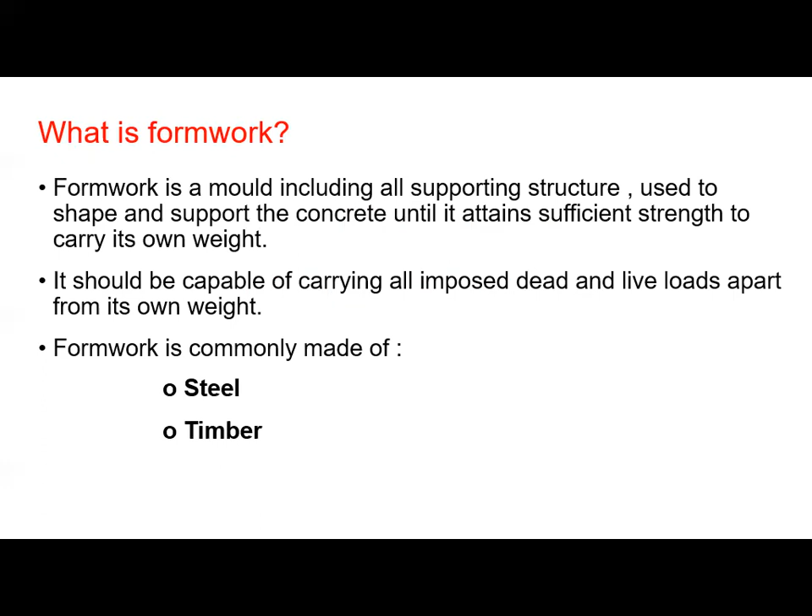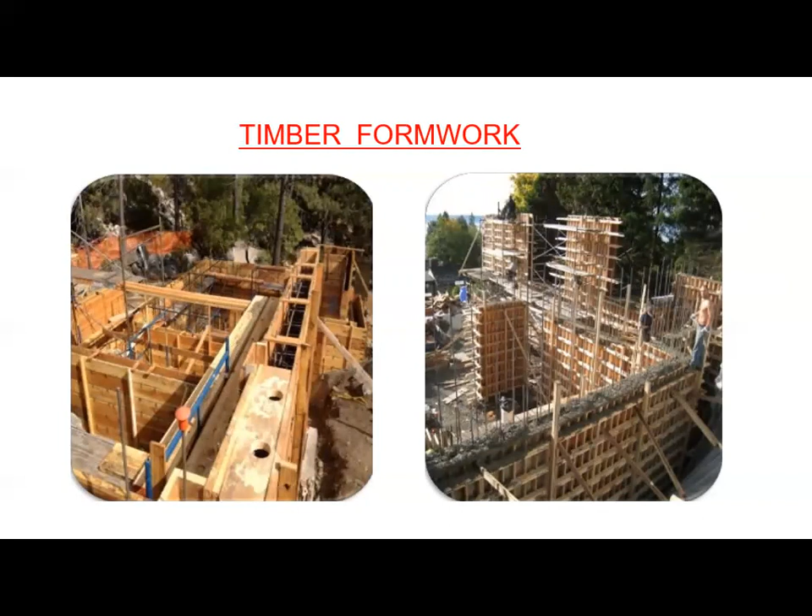It should be capable of carrying all imposed dead and live loads apart from its own weight, and normally it is of steel and timber material. Nowadays fiberglass is also used for making this formwork. So this is the photograph of timber formwork. That is the old and famous design for construction activity. Then this is a steel formwork.

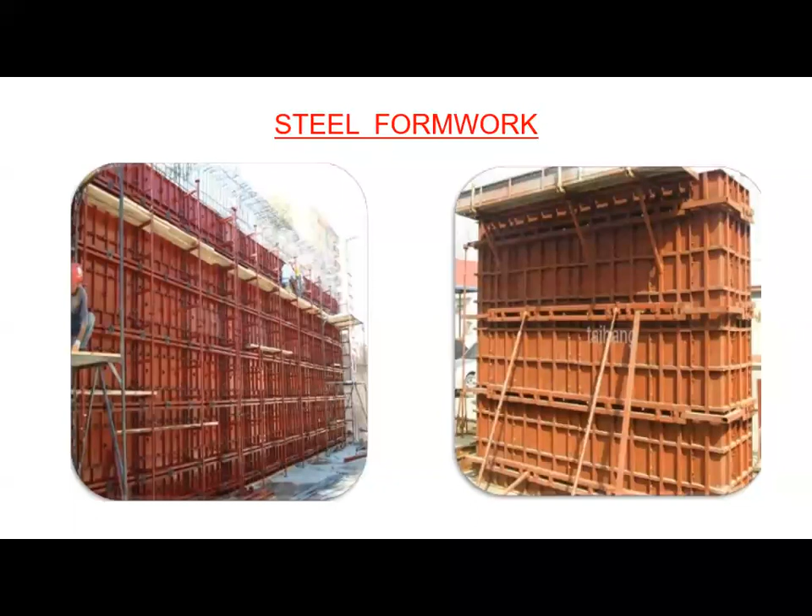So what are the general characteristics of this formwork? Formwork has been in use since the beginning of concrete constructions. Even before concrete was utilized in construction, we utilized this formwork. Generally timber formwork was used, and then metal or steel formwork came to be used. And nowadays fiberglass is also used. So these new materials such as steel, plastic, fiberglass are used.

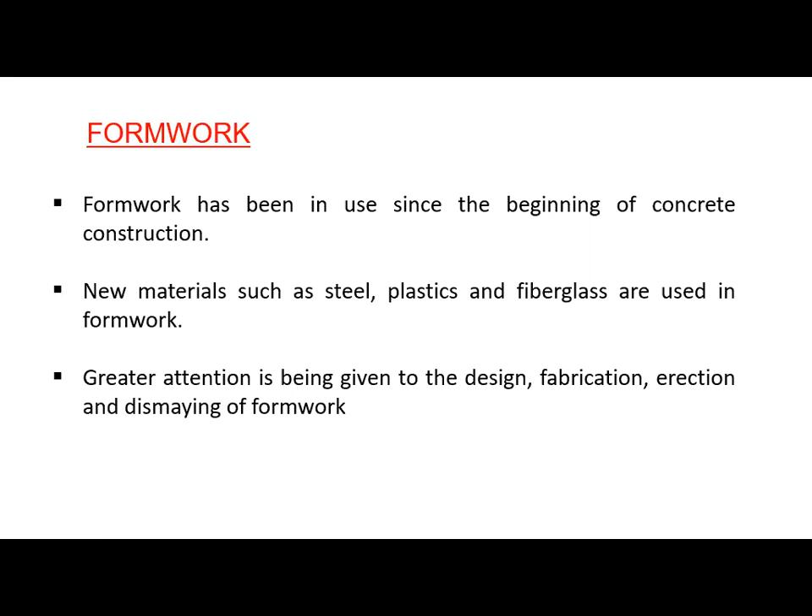Greater attention is being given to the design, fabrication, erection, and dismantling of the formwork. We have to design this formwork in such a way that fabrication should be easy, erection and commissioning should be easy, assembling and dismantling should be easy, and it should consume very little time to assemble and disassemble. So we have to think about all these things while finalizing the design of this formwork.

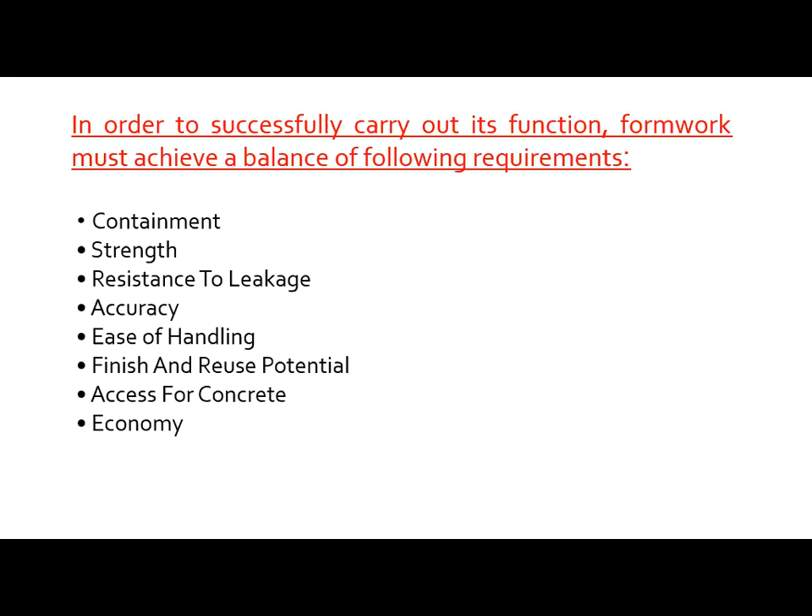And in order to successfully carry out its functions, formwork must achieve a balance of some parameters. We have to think about containment, strength, resistance to leakage, accuracy, ease of handling, finish and reuse potential, access for concrete, and economy. That is nothing but the cost of the formwork, which should be cheap or at least at the optimum cost. So we have to balance all these parameters for purchasing or finalizing the designs of this formwork.

So what is containment? The formwork must be capable of shaping and supporting the fluid concrete until it cures, because nowadays most construction activities use concrete mixture. So if we are using concrete, we have to think about shaping and supporting, and that should be supported by that design or structure.

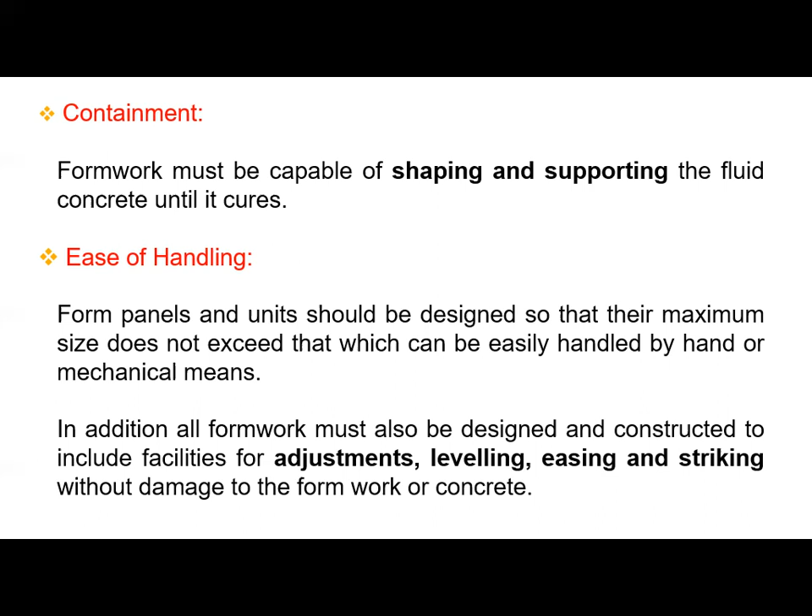Then this formwork should be adjustable, in such a way that leveling, easing and striking without damage are possible with it. That point is called ease of handling. So it should be very easy to handle all these types of formwork.

Then the strength of this formwork should be thought of, because we are using concrete, water, and labor. So think about the weight of fluid, weight of concrete, weight of labors, weight of equipment or tools used by the labors, and environmental loading. We have to think about all these things. That is why the strength of the formwork is very important.

And then economy. We know that if metal structure, fiberglass, or heavy, strengthened timber is used, then the formwork is very expensive. Generally, on average about 35% of the total cost of any finished concrete unit or element can be attributed to its formwork. So if you calculate 35% of the total cost of the finished concrete unit, that is equivalent to the cost of the formwork.

And out of that, 40% can be taken for the material and 60% for the labor. So this is the general guideline for the cost of the formwork. That is why we have to think about the design and material of this formwork in such a way that we can reuse it to minimize the cost.

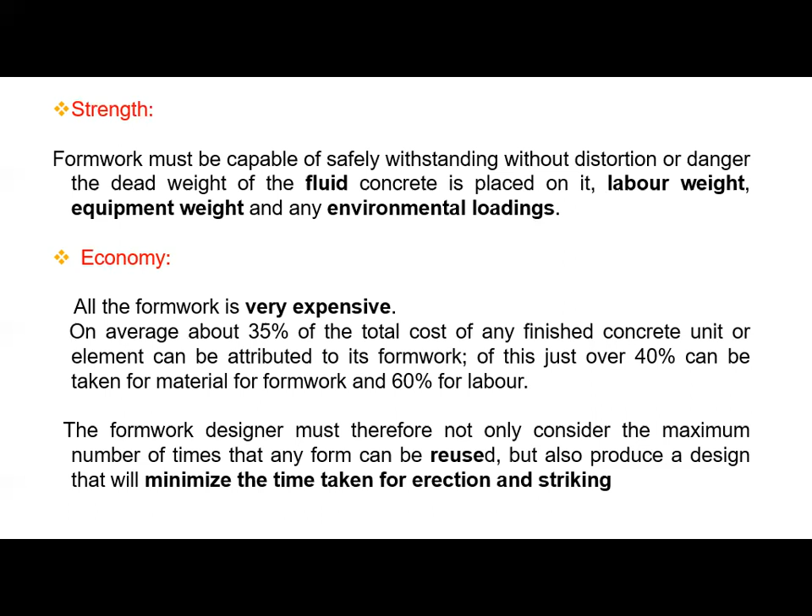And also we have to think about minimizing the time taken for the erection and striking. So these are some of the guidelines and the characteristics of this formwork. The specific objective of this formwork is related to quality, safety, and economy.

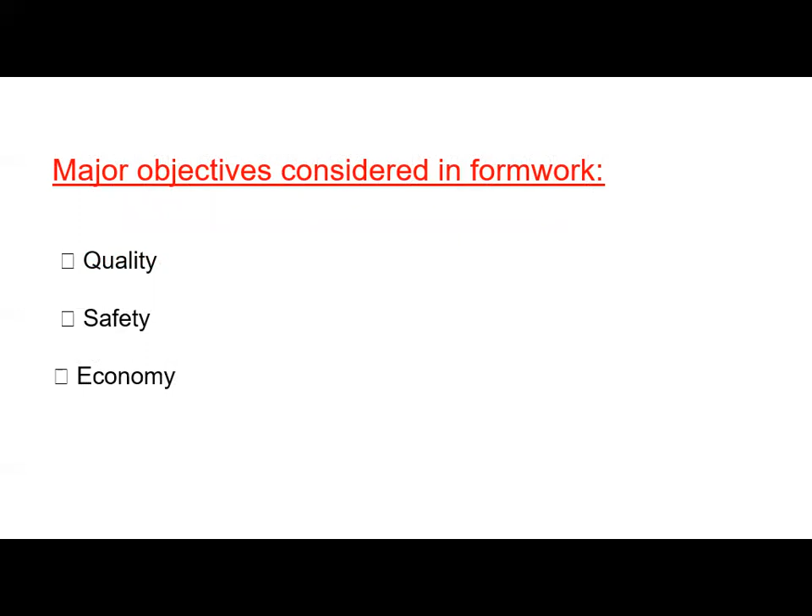Related to quality, the formwork must be designed and built in such a way that it has sufficient stiffness and accuracy so that the size, shape, position, and finish of the cast concrete are maintained.

Then from the safety point of view, it should have sufficient strength and factor of safety so that it is capable of supporting all the loads, because we have already discussed the environmental loads, the labor loads, the tool loads, equipment loads, concrete load, or the other fluids which are used in the construction work. So all these loads should be carried by this formwork.

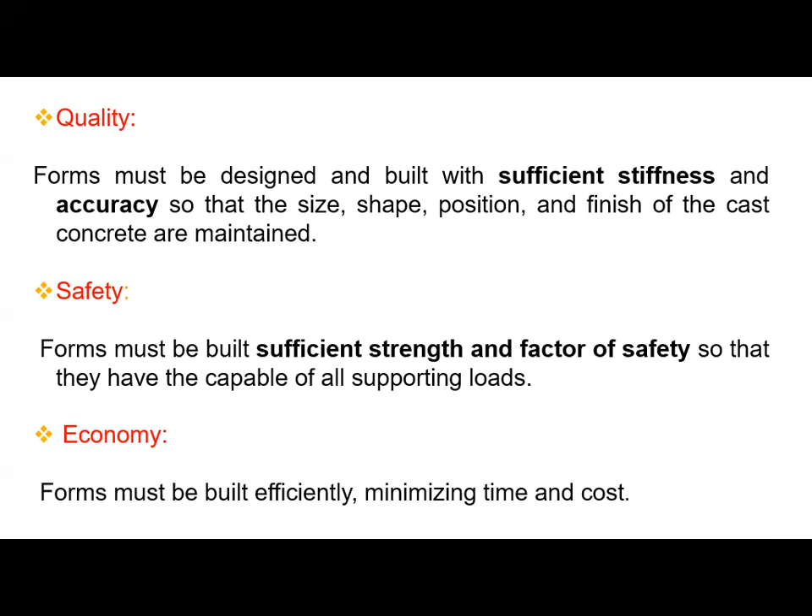And obviously the economy, so it should be optimum in costing, and it should minimize the time for striking and erecting. Then these are the basic requirements related to the formwork: the material should be cheap and reusable. It should be practically waterproof so that it does not absorb water from the concrete.

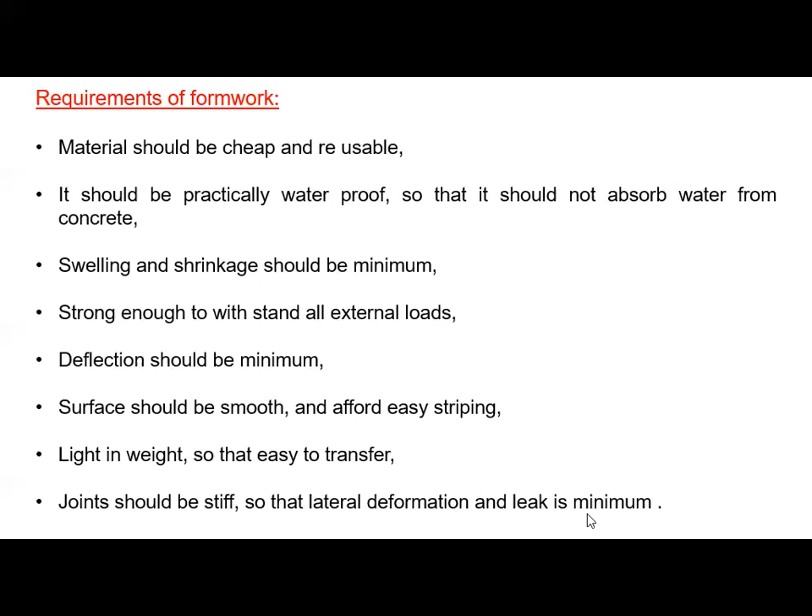Then swelling and shrinkage should be minimum, strong enough to withstand all external loads. Deflection should be minimum. Then the surface should be smooth and afford easy stripping. Then light in weight so that it is easy to transfer. Joints should be stiff so that lateral deformation and leakage is minimum. So no leakage, waterproof, lightweight and easy to handle. These are some of the requirements for the formwork.

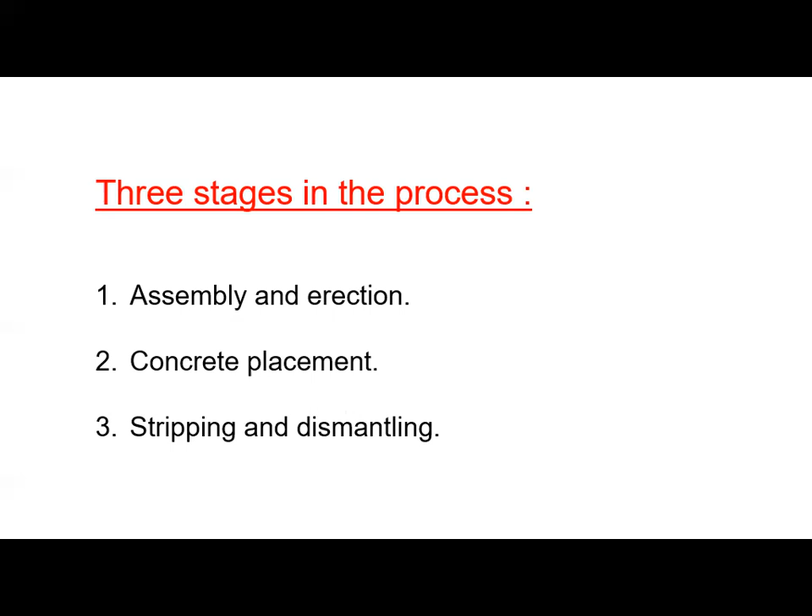So there are 3 stages in the process of this formwork: the first is assembly and erection, the second one is concrete placement, and the third one is stripping and dismantling. So these are the steps related to the formwork in concrete construction. That construction may be of buildings, bridges, residential apartments or commercial apartments.

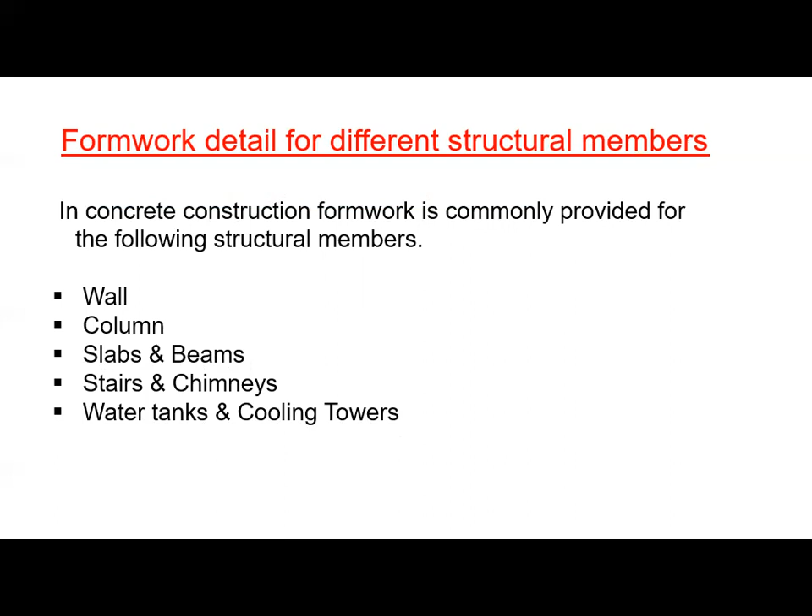So in concrete construction, formwork is commonly provided for the following structural members: wall, column, slabs and beams, stairs and chimneys, water tanks and cooling towers. So these are the different structural members related to the formwork.

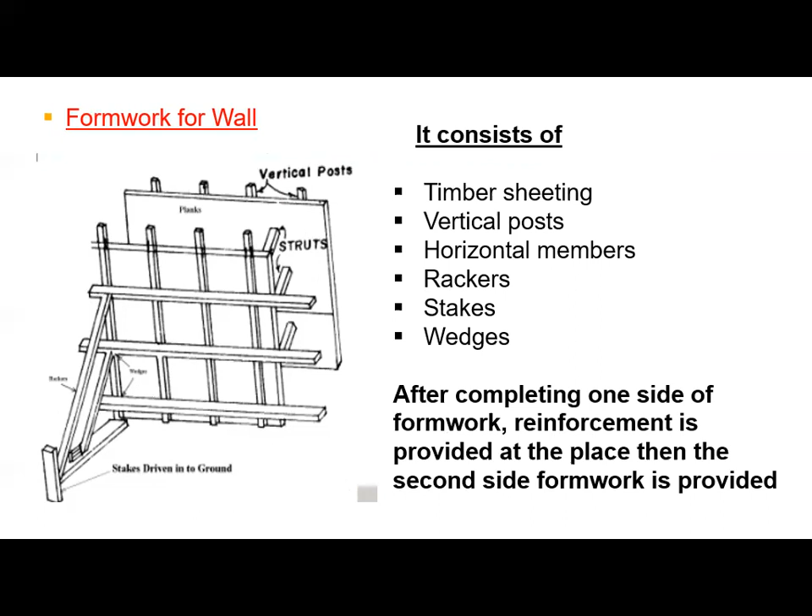So this is formwork for a wall. It consists of timber sheets. From this sketch you can understand, this is the timber sheeting. Then this is the vertical post. Then horizontal members, then rakers, stakes and wedges. So from the sketch itself, you can understand the function of each and every element of this formwork for the wall.

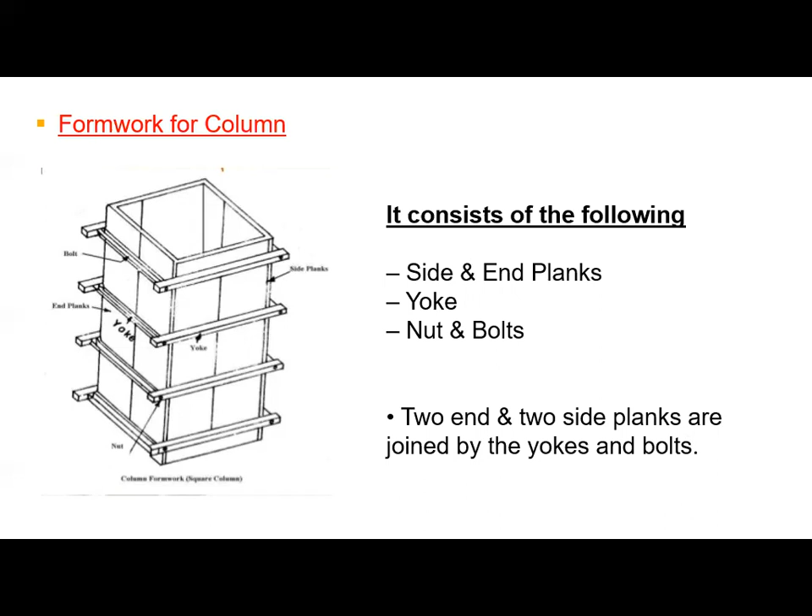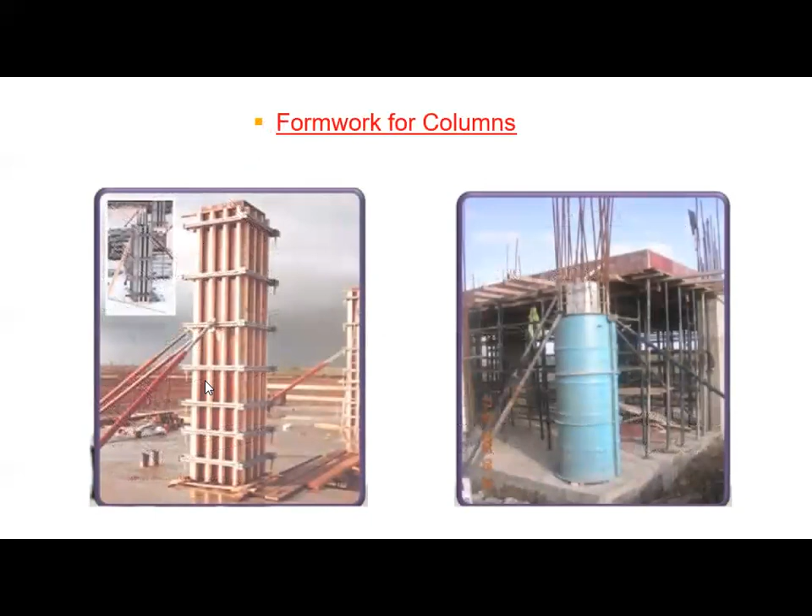Now, the main thing in construction work is concrete. Anyone who works around big or heavy concrete slabs should be aware of the hazards related to concrete. Generally, contractors, subcontractors and their casual wage workers are involved in these construction activities, but they must know about the potential to cause severe harm related to concrete, because they are actually working on the platforms and handling this concrete.

So there are mainly two types of concrete, that is dry concrete and wet concrete. Dry concrete mainly involves cement or cement dust, which is packed in 50 kg bags. Its handling, safety precautions and hazards have different characteristics, and wet concrete also has different hazardous characteristics. So with the handling of dry and wet concrete, significant damage is possible in this type of work.

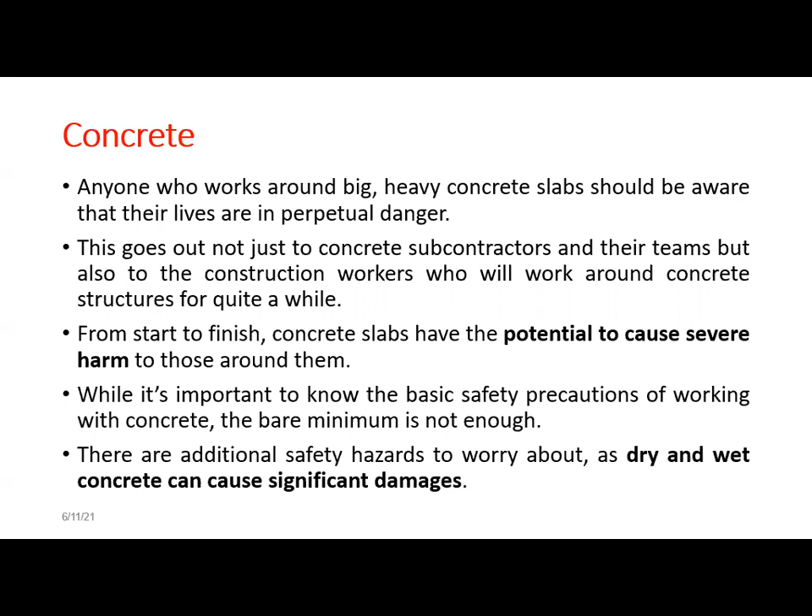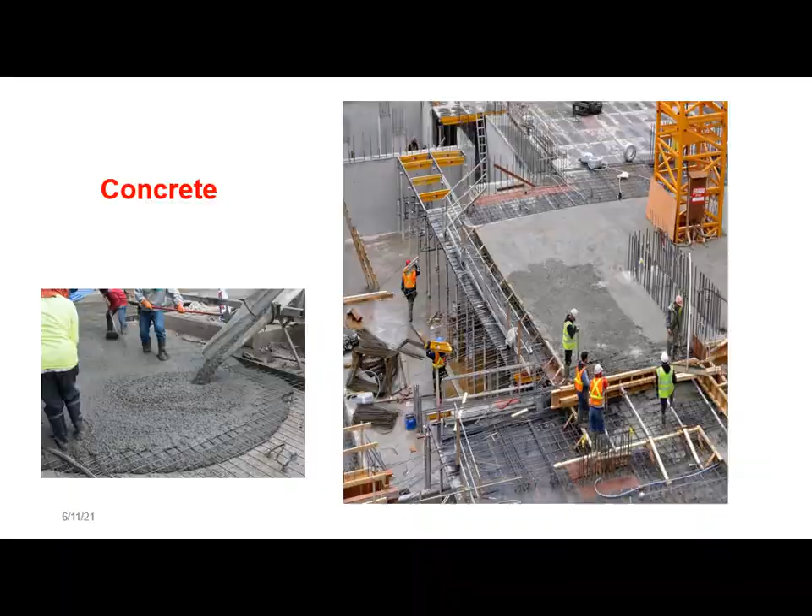So what are the rules or safety requirements related to concrete? Everyone who works with concrete should be aware of the required safety regulations. Mainly the OSHA regulations are given.

In that, the specific guideline is related to the PPE, that is personal protective equipment. So if you are handling this dry or wet concrete, then we have to wear gloves and safety glasses. And also there should be a provision of an eye wash station, because in case of contact of these concretes with the skin, the face or the eyes, we have to utilize this eye wash station for washing that particular part of our body to wash off that concrete.

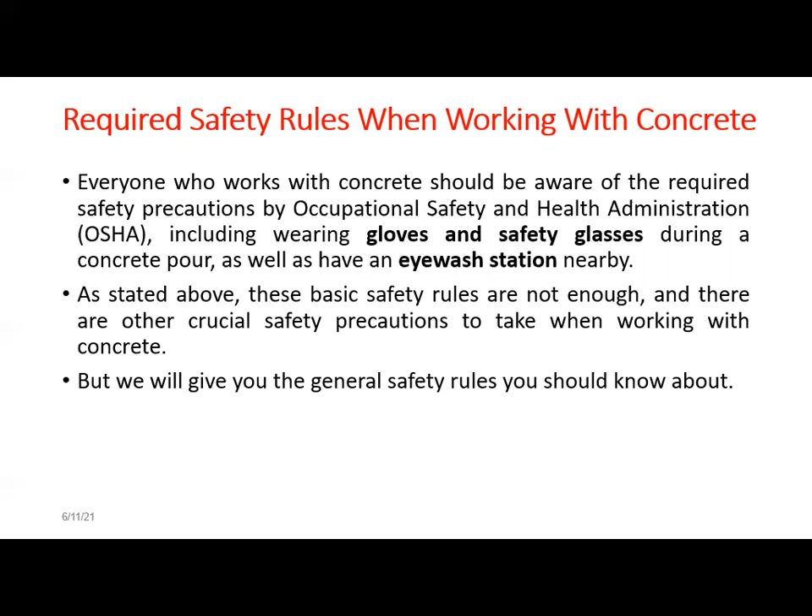So there are various hazards or risks involved in concrete. The first is mixing risk. So we know that concrete is nothing but a mixture. It is the general mixture of cement dust, sand, water, and some crushed stones. That depends on the concrete construction, but these are the major elements.

So this cement dust, or generally we call it concrete dust, can cause breathing problems, because this dust has a size at the respirable suspended particulate matter level. So this is the RSPM criteria, and the size of that cement dust is such that we are going to breathe this dust if it is available in the breathing area. So again, that can cause lung issues, which can cause temporary or permanent damage to our lungs after inhalation for a longer time and at frequent intervals.

So the second risk is pouring risk. When we have prepared this mixture, we have to pour this mixture into that particular part where the construction is going on. Initially this mixture has slippery characteristics. So concrete can be slippery until it dries. That is the characteristic of the wet concrete mixture. So due to these slippery characteristics, there is another danger, that is the slipping and falling hazard.

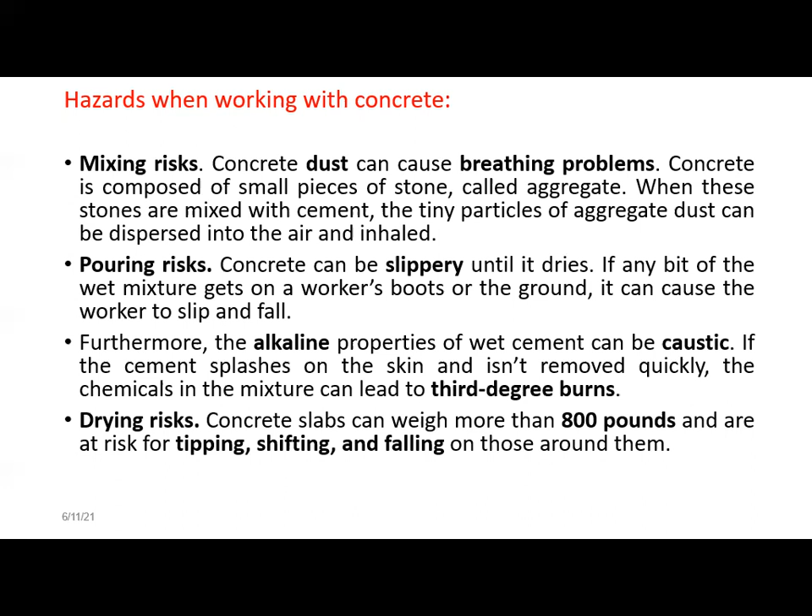Then the next risk is drying risk. So approximately more than 800 pounds of weight is there due to this concrete structure on the slab, and that is why there is a risk of tipping, shifting and falling on those around them. So those are the different risks related to concrete.

And these are the general dangers related to concrete. If you are working with concrete, some of the dangers are workers falling onto concrete slabs, workers being crushed by slabs falling from cranes or forklifts, workers getting pinned between concrete slabs, workers suffering heat stroke while cleaning truck mixer drums, workers being impaled on rebar sticking out of the concrete slabs,

workers getting caught in concrete mixers or covered with concrete, workers being burned or blinded by the concrete chemicals due to the alkaline or caustic properties, and workers suffering back injuries from lifting heavy concrete slabs. These are the different dangers related to concrete.

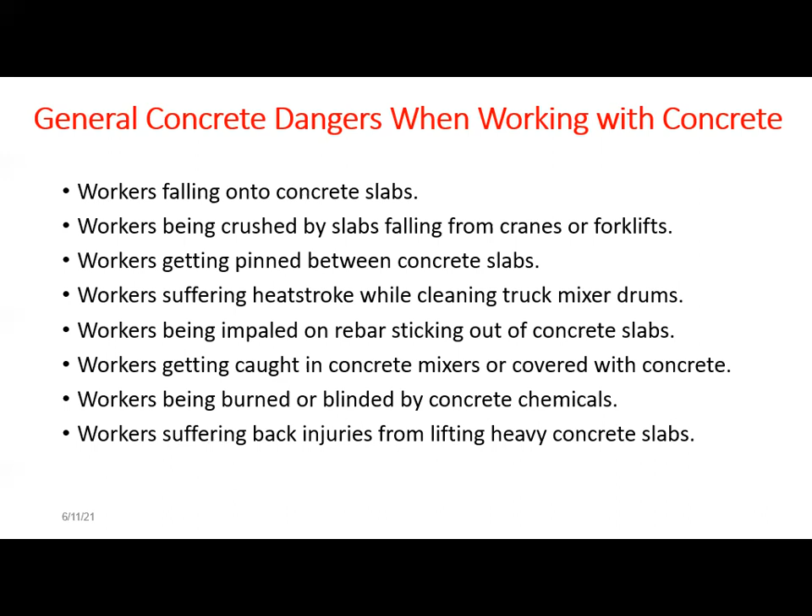So if any worker complains about back pain or some irritation to the skin, irritation to the eyes or some other issues, then we have to take care about these guidelines or the safety or precautionary measures while working with concrete. So these are some of the guidelines specifically for dry concrete as well as for wet concrete.

Related to dry concrete, dry concrete can irritate the eyes, nose and throat as well as the skin, and there may be chances of silicosis or lung cancer due to the silica dust. As this cement is made up of silica, there may be chances of silicosis also. So what are the safety precautions for handling dry concrete?

We have to use the eyewash station or eyewash bottles, and we have to flush the eyes with water. So flushing of eyes is one of the safety precautionary measures. Then washing your hands with soap and water. So to minimize or nullify the effect of this caustic or alkaline cement, we have to use soap and plenty of water for washing our hands.

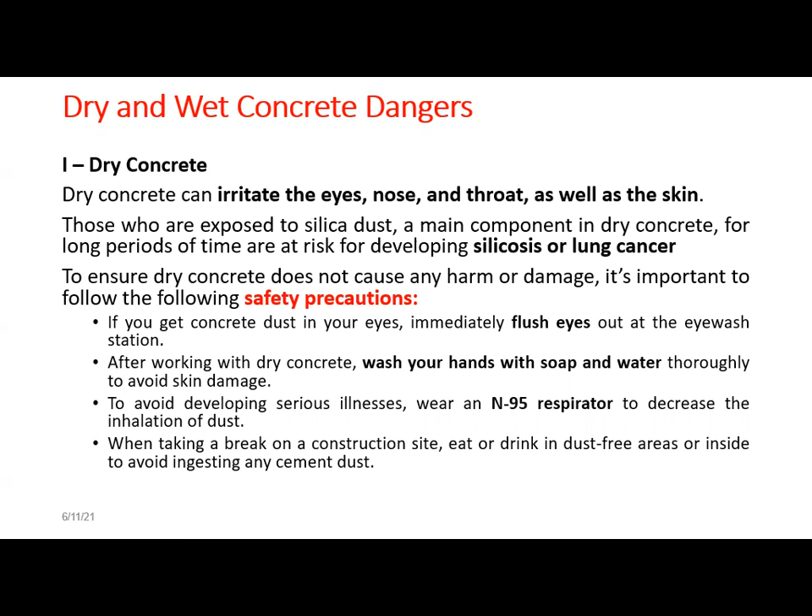To avoid silicosis or lung diseases, or to avoid the respiration of this dry concrete or cement into our respiratory systems, we have to utilize N95 respirators. Then, when taking a break on construction, eat or drink in dust-free areas. That is the recommendation to avoid ingesting any cement dust. So these are related to the dry concrete.

Now, related to the wet concretes. As we know, wet properties are there, meaning moisture or water is present. So obviously the risks related to the respirable suspended particulate matter, or RSPM, of concrete or cement dust are going to be minimized, and that is why many hazards are minimized due to these wet properties. But still, there are some properties of wet concrete that may present hazards. So for that purpose, we have to take care in handling these wet concretes.

Some of the safety precautions: to protect your skin and eyes, wear alkali-resistant gloves, because we already discussed that wet concretes have alkaline properties, that is, they are caustic. So we have to wear alkali-resistant gloves. Then long sleeves and long pants are preferred to avoid skin contact. If possible, waterproof boots and eye protection should also be provided. It is good practice to keep extra gloves and safety glasses at construction sites.

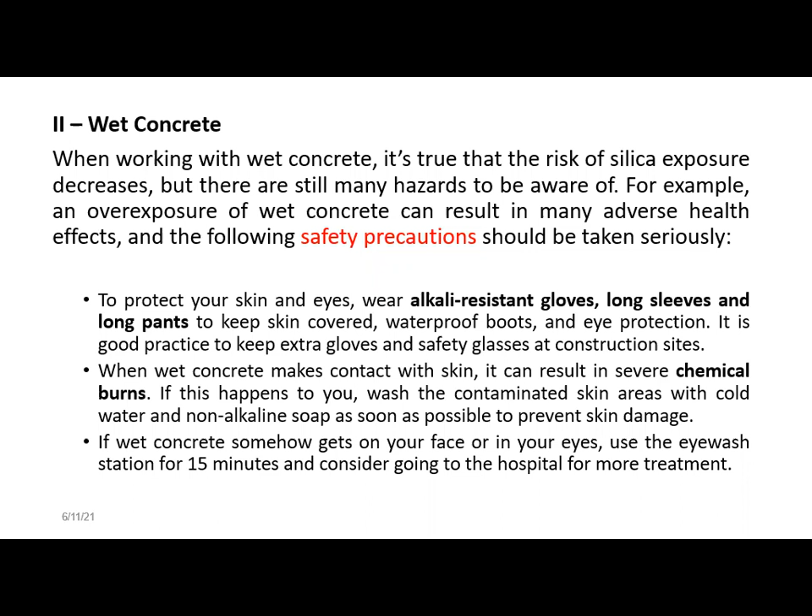When wet concrete makes contact with the skin, it can result in severe chemical burns. If this happens to you, wash the contaminated skin areas with cold water and non-alkaline soap as soon as possible to prevent skin damage. And we have to wash the face or eyes for at least 15 minutes with the help of an eye wash station or eye wash bottles if your skin, face or eyes come in contact with wet concrete. After that, if the irritation or complaint of that worker continues, we have to visit a doctor or hospital. So these are some of the guidelines for dry concrete and wet concrete.

Now, this is another part of the construction site, called cofferdams. We have learned about formwork, concrete structures and some safety precautionary measures. From this photograph you can understand what a cofferdam means. So what is a cofferdam? Cofferdams are temporary enclosures to keep out water and soil so as to permit dewatering and construction of a permanent facility in the dry. We provide temporary enclosures to keep out the water and soil. That is the main objective or purpose of cofferdams.

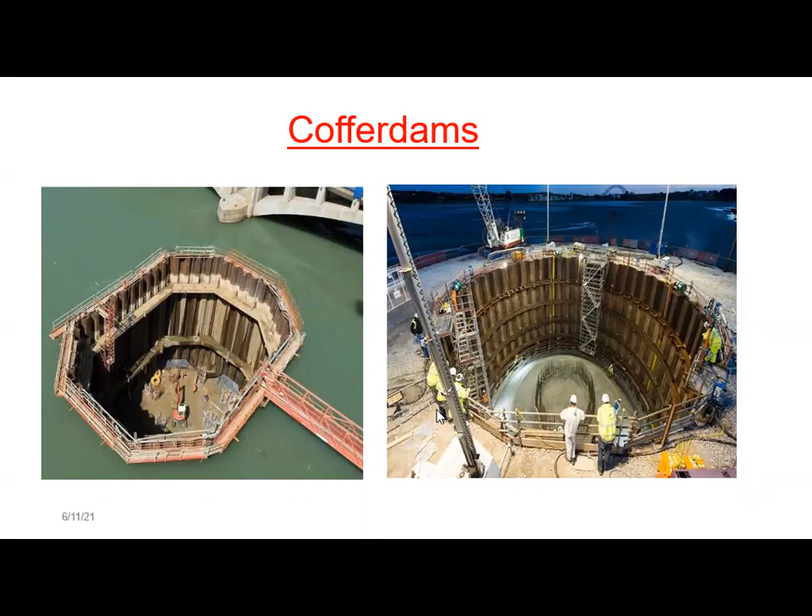A cofferdam involves the interaction of the structure, soil and water. The loads imposed include the hydrostatic forces of the water, because in this picture you can see that some cofferdams are surrounded by water, and this water produces hydrostatic force on the cofferdam. Sometimes cofferdams are isolated from the water to avoid these hydrostatic forces. But whenever that is not possible, we have to calculate these hydrostatic forces for design purposes. Then dynamic forces are also there due to currents and waves. So we have to consider both hydrostatic and dynamic forces while designing cofferdams.

In construction of cofferdams, maintaining close tolerances is difficult since cofferdams are usually constructed offshore and sometimes under severe weather conditions, because the main objective of a cofferdam is to keep out water and soil. In these circumstances, significant deformation may occur: due to these forces and unexpected changes in weather, waves or ocean water, there may be changes in the shapes and sizes of these cofferdams. So we have to think about these deformations.

Significant deformation of cofferdam elements may happen during construction, and therefore it may be necessary to deviate from the design dimensions in order to complete the project according to plan. So in the design dimensions, we have to consider hydrostatic forces, dynamic forces, and deformation possibilities or worst cases, and only then decide the dimensions of the cofferdam design. In cofferdam construction, safety is a paramount concern since workers will be exposed to the hazards of flooding and collapse.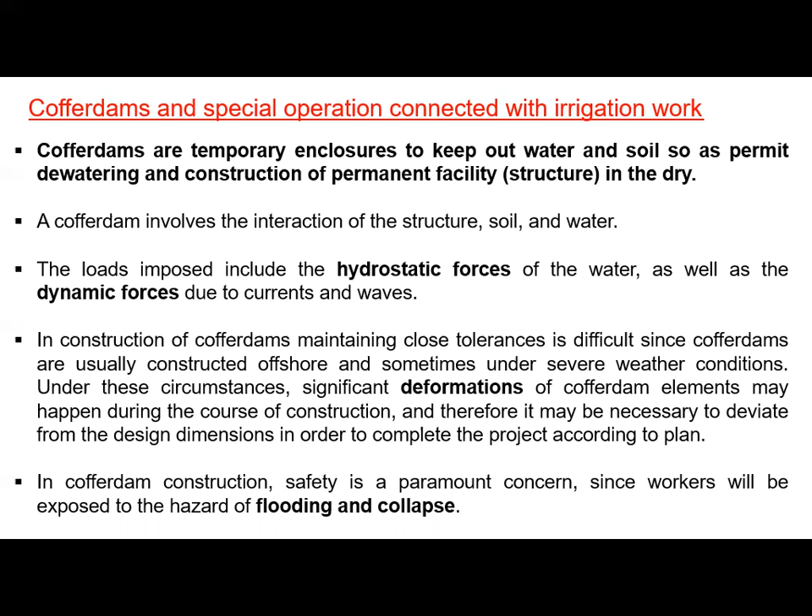So there may be a chance of flooding, and sometimes if the forces are more, especially I'm talking about the hydrostatic forces, if the forces are more than expected or the average calculations, then there may be a chance of collapse. So if this coffer dam collapses, there may be fatalities, because we have very little chance to isolate these workers or to remove these workers from these coffer dam structures.

So there are different types of coffer dams: first is braced, second is earth type, third is timber crib, and fourth one is double wall sheet pile. So the braced coffer dam is formed from a single wall of sheet piling which is driven into the ground to form a box around the excavation site. So we are going to prepare this box. So if it is box type, then it is called a braced type coffer dam.

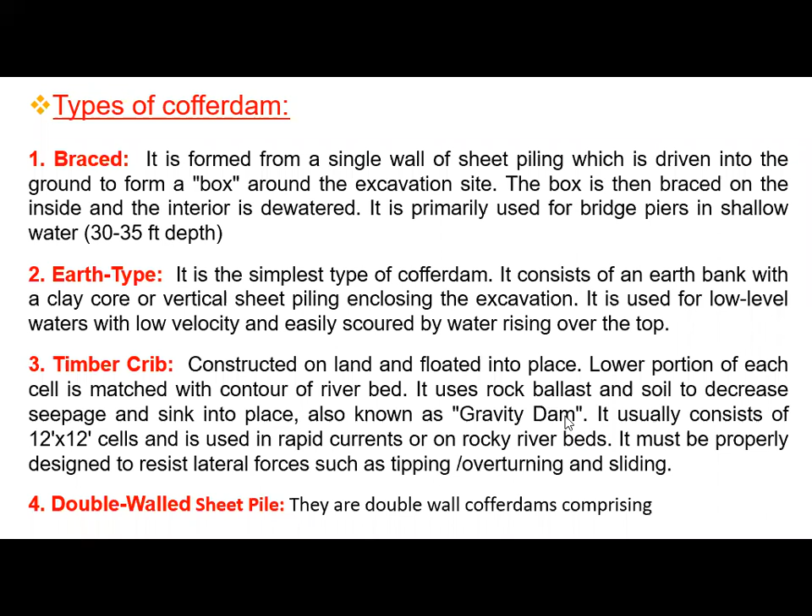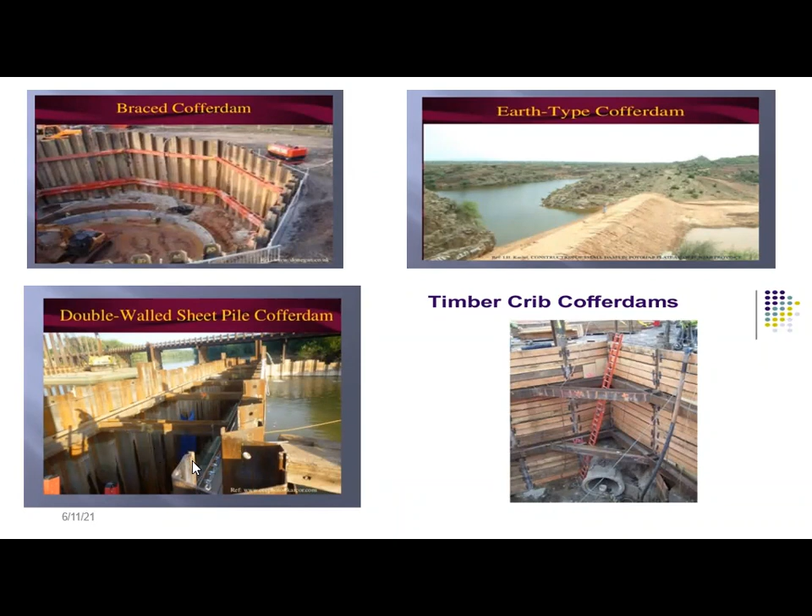Then double wall sheet pile. So they are double wall coffer dams, comprising different structures. You can understand from this photograph. They have double walls. So these are the different coffer dams.

Now at the construction site, we are using various machinery and equipment for the construction works. And mainly these are heavy machinery and heavy equipment. So there is a hazard related to the handling of this machinery and equipment. So at the construction site, in many cases, there are various facilities provided for controlling these accidents or incidents while handling this machinery and equipment.

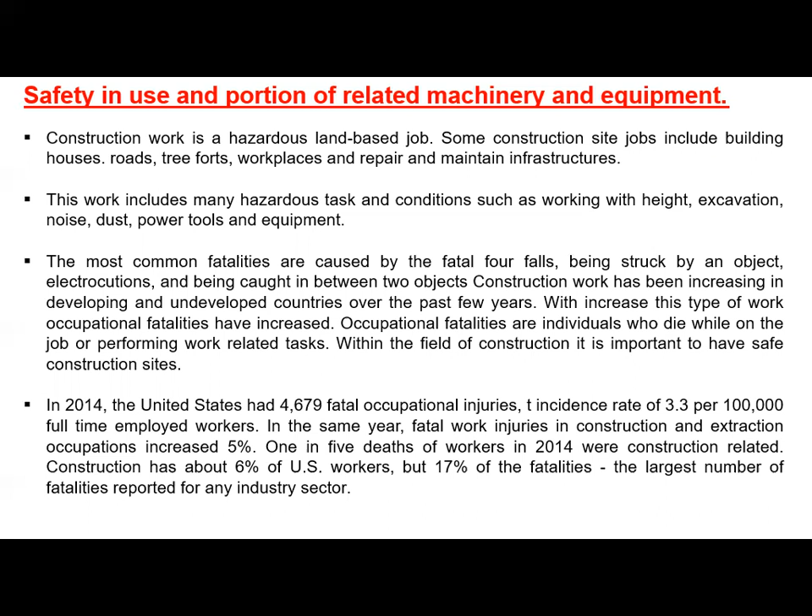Especially we have to take care about the movement of this machinery and equipment, and some of the data clearly shows that there are various fatal accidents. In 2014 the US clearly mentioned 4,679 fatal accidents or occupational injuries, and in 2020-21 also, if you think about these fatal accidents, injuries or disablement cases at construction sites, then you can understand we have to take care with this machinery and equipment while handling it at the construction site.

So there are various construction machines at the construction sites. Sometimes we have to utilize small machines, sometimes extraction or loading machines, finishing machines, adjustment machines, compacting machines, transport machines, handling machines, and out of production machines for loading, trial, and maintenance.

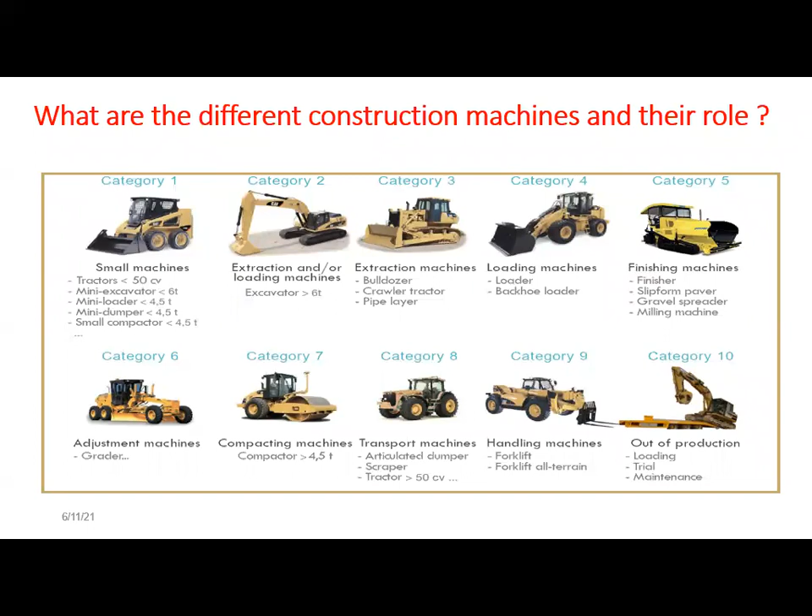So depending on the construction's requirement, we have to utilize different types of machines, which are categorized into 10 parts. These categories are tractors and small mobile construction machines, extraction or loading by sequential displacement, extraction by alternative displacement, loading by alternative displacement, slow moving finishing, adjustment by alternative displacement, compacting by alternative displacement, transport or extraction transport, handling, out of production, etc.

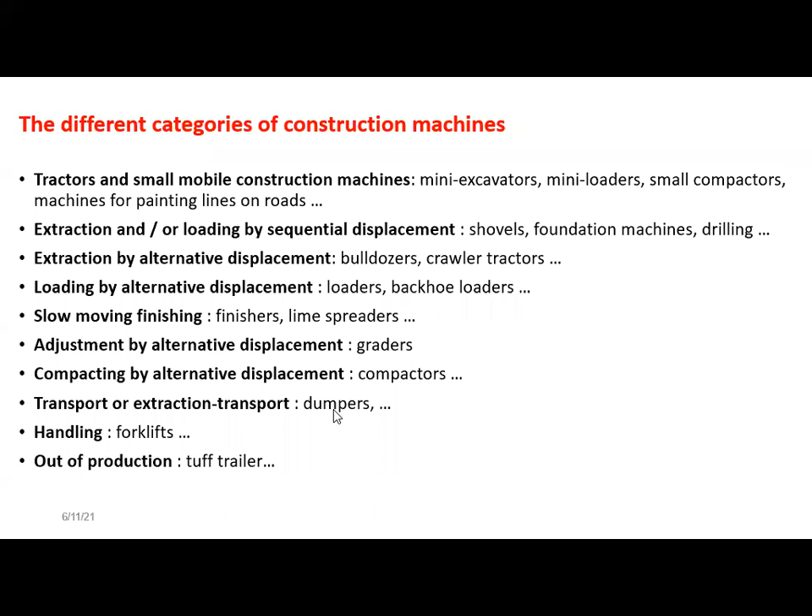And within these categories, there are different examples of machinery, like mini excavators, mini loaders, small compactors, shovels, foundation machines, drilling machines, bulldozers, crawler tractors, loaders, backhoe loaders, lime spreaders, finishers, graders, compactors, dumpers, forklifts, and trailers, etc. So these are the different categories of construction machines.

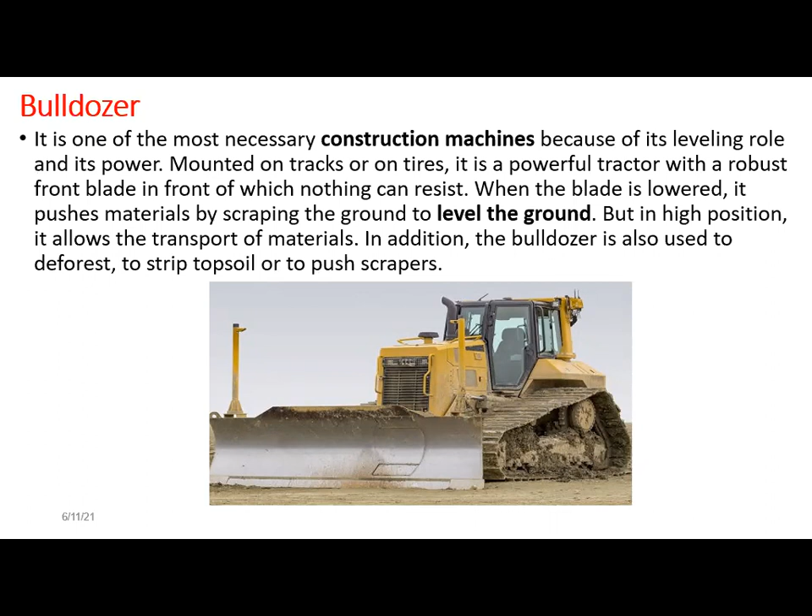So we know many of these machines, and we also discussed them in one of the sessions, so I'm going to skip the details of all these types of machinery. So at the construction site, in construction activity, the bulldozer is one of the machines used for leveling the ground.

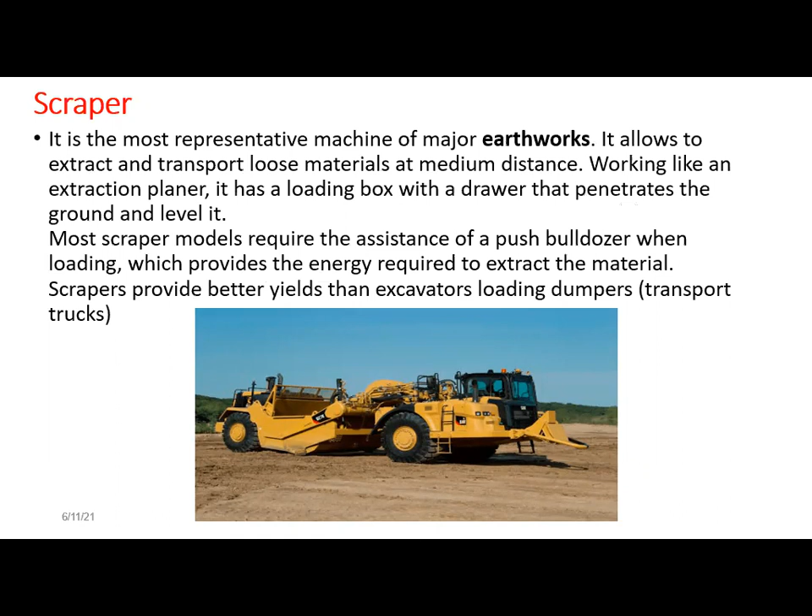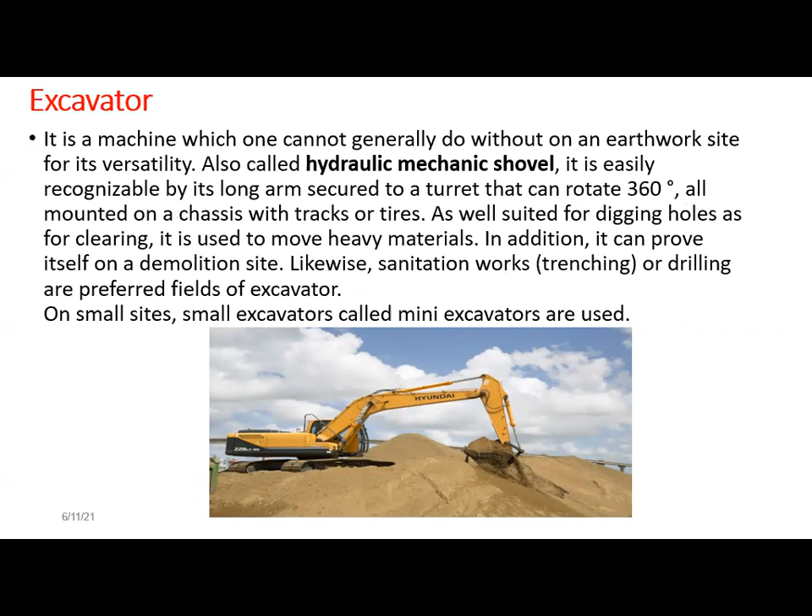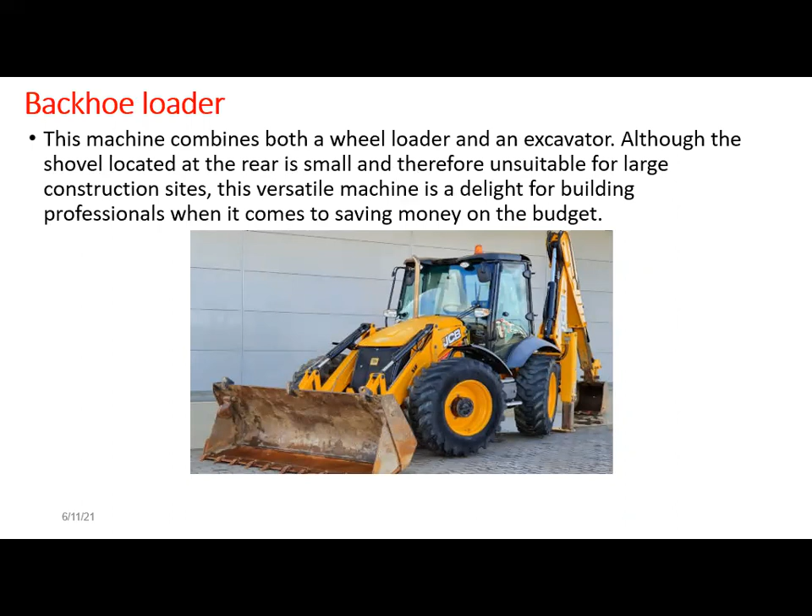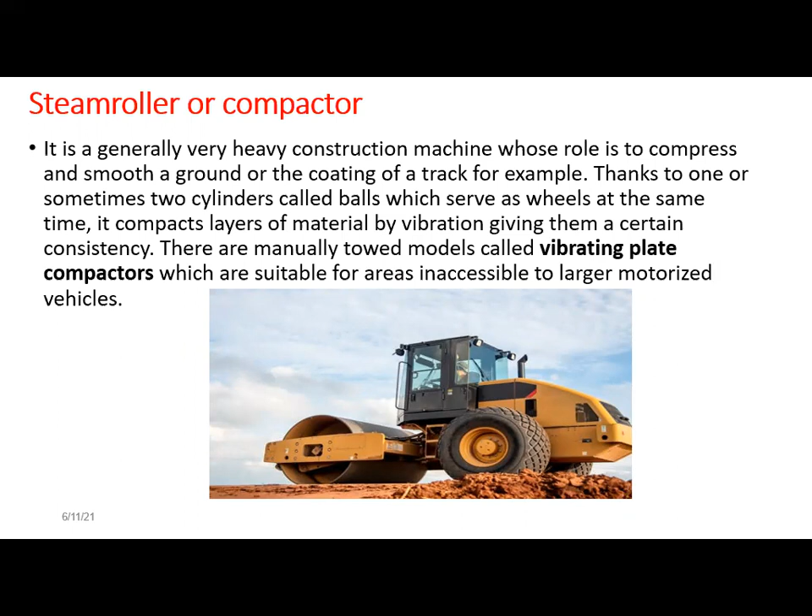So what are the safety risks associated with construction? There are main 4 risks or hazards, which are normally called the fatal 4 at the construction site. So what is fatal 4? Fatal means death. This is the leading cause of deaths in the construction industry.

Why fatal 4? There are 4 elements: falls from heights, being struck by an object, electrocution, and being caught inside or compressed by equipment or objects. These are the 4 elements due to which there are chances of fatality at the construction site. That is why it is called the fatal 4.

Then other hazards or injuries are slips, trips, and falls. There may be chances of these slips, trips, and falls at the construction site. Then there is a chance of falls from heights. Some statistical data clearly gives you the idea that more than 300 construction workers die each year and more than 10,000 more are seriously injured by falls from heights.

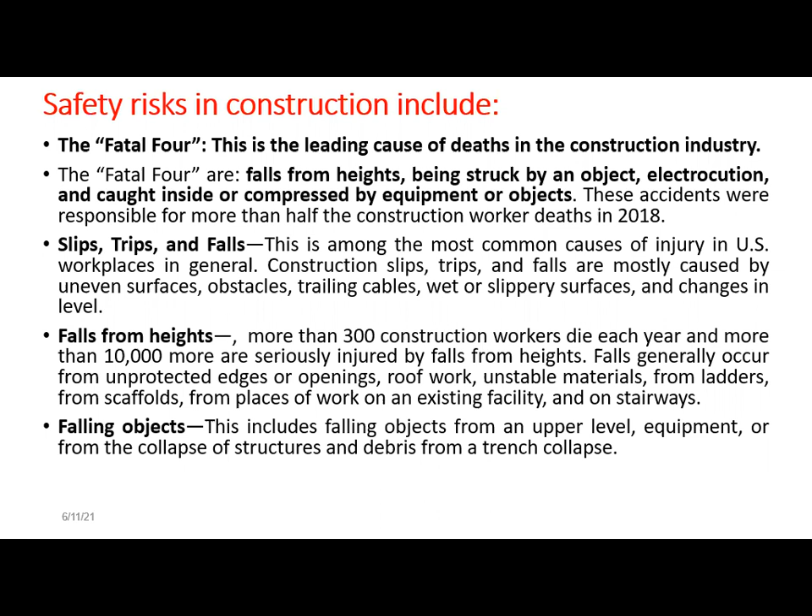Then falling objects. We know that workers are using various tools and equipment at the construction site, so there is a chance of objects falling: from an upper level or from equipment, from the collapse of a structure, and debris from a trench collapse. These are the variety of examples of falling objects.

Then there may be chances of electric shock and arc flash or arc blast. Poorly maintained electrical equipment or work near overhead power lines puts workers at risk. If that is not maintained properly, then there may be chances of electric shock, and it is one of the factors of the fatal 4.

Then machinery risks include rollover of large construction equipment, objects falling onto the equipment, and malfunctioning safety and other warning devices on large vehicles. Then failure to use PPE, that is personal protective equipment. PPE protects employees against falling objects, debris, chemical and biological exposure, and moving vehicles.

Then repetitive motion injuries: temporary or permanent injuries to the muscles, nerves, ligaments, and tendons caused by performing the same motion over and over again, because many workers have a job profile in which they perform the same work or the same motion on a repetitive basis.

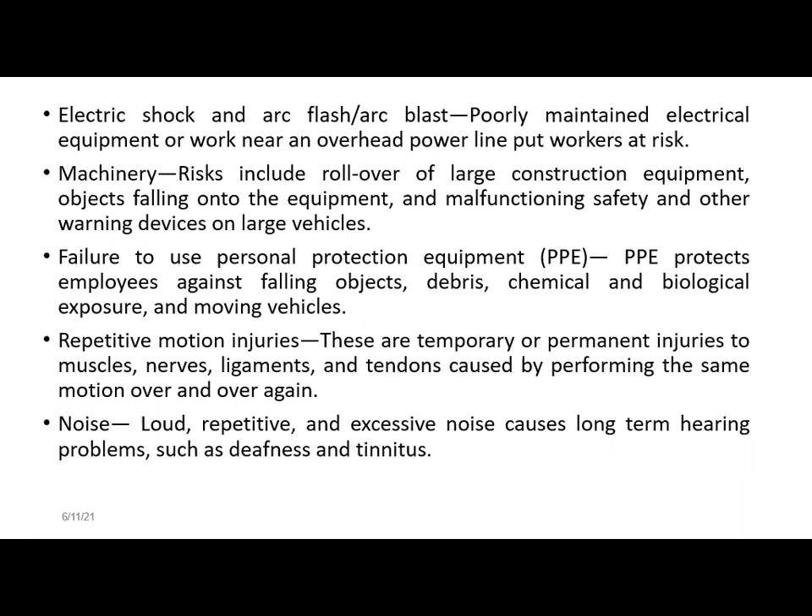Then there is a hazard called noise. Loud, repetitive, and excessive noise causes long-term hearing problems such as deafness and tinnitus. So these are the variety of hazards which may be present at the construction site. And these are the construction safety equipment. So how do we reduce this hazard, how do we reduce this risk?

We can reduce the risk at the construction site by utilizing different safety equipment like helmets or hard hats. We reduce the risk related to falling objects or head injuries, which are very common at construction sites. Hard hats also protect workers from striking head injuries, as well as from rain, direct sun rays, and electric shocks.

Then hi-vis clothing, also called high visibility clothing. The use of high visibility clothing reduces the chances of struck-by accidents, which are another element of the fatal 4. So we can avoid struck-by accidents by using hi-vis clothing.

Then safety footwear. Slips, trips and falls are common accidents at job sites, and falls from heights are of particular concern in the construction industry. Every worker on the construction site should wear anti-skid or gripping boots and steel or composite toe boots to prevent foot injury from falling objects.

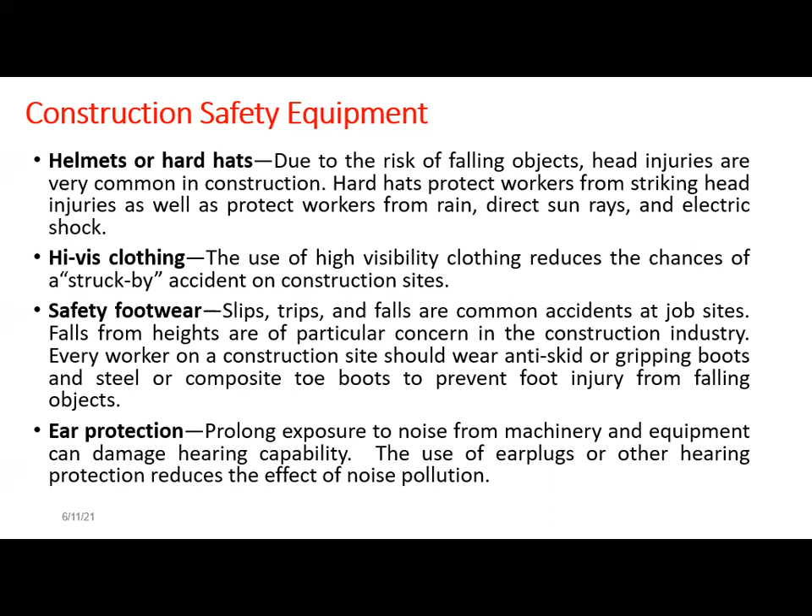Then we can protect the ears by using ear protection devices. We can also reduce noise exposure or the noise hazard with the help of ear plugs or ear muffs.

Then we can protect our eyes and face with the help of eye and face protecting devices like goggles or some of the specific safety glasses, face masks or welding shields, chemical splash goggles, dust goggles, etc. So depending on the construction environment, we have to use these types of PPEs.

Then gloves. Using heavy duty gloves while working helps workers avoid hand injuries like cuts and burns. These types of gloves can be utilized depending on the task also. So if there is alkaline or caustic wet concrete or some other chemicals, we have to use the alkali-resistant gloves.

Then wheel chocks. So chocking all vehicle wheels when not in use or parked on an incline can prevent unintentional movements. So warning whips should be there. Warning whips on smaller equipment can increase the visibility. Then cable protectors. Cable protection systems provide a safe method of passing traffic while protecting valuable electrical cables, cords, and hose lines from damage.

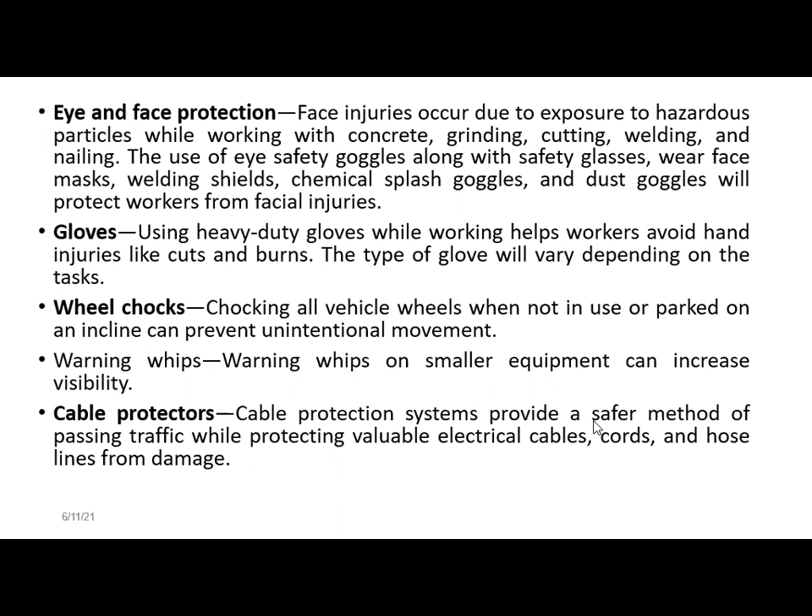So we can utilize all these types of safety equipment to protect our body parts, and we can reduce the hazards or the risk which is present at the construction site.

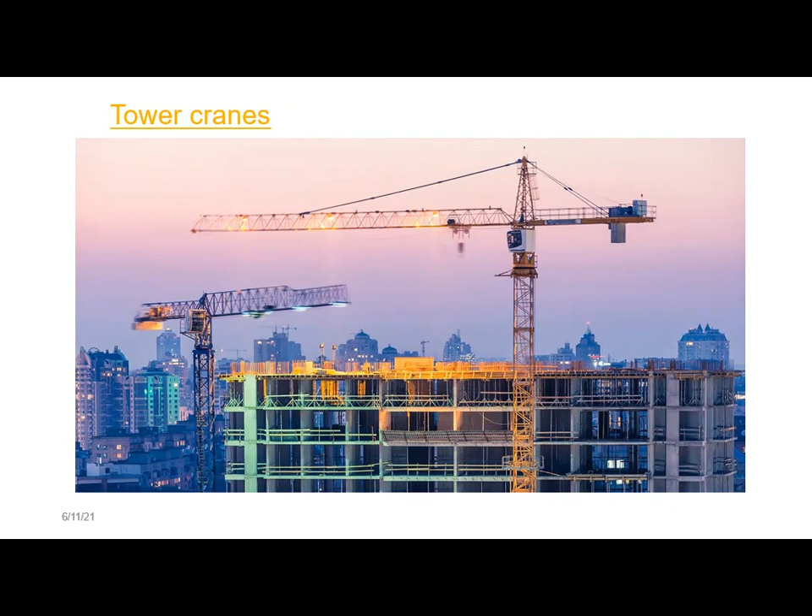Now this is related to the tower cranes. It is another part of construction, because we are utilizing these tower cranes especially for high-rise buildings or the major constructions. And at major construction sites, there is always the possibility of hazards related to the tower cranes. So what are the precautionary measures related to the tower cranes?

A safe system of work should be established and documented by the owner. Such a system should be followed for every lifting operation, whether it is an individual lift or a series of repetitive operations. This safe system of work should be prepared and endorsed by the owner with the advice of the competent person, the safety officer and other relevant personnel.

The same principle should be applied whether the lifting operations are carried out at a construction site or the crane is a permanent fixture, for example in a factory or at a dock. The safe system of work should be effectively communicated to all the parties concerned by the owner. We have heard and seen news related to tower crane collapses, and that is why we must take care of all these precautionary measures related to tower cranes.

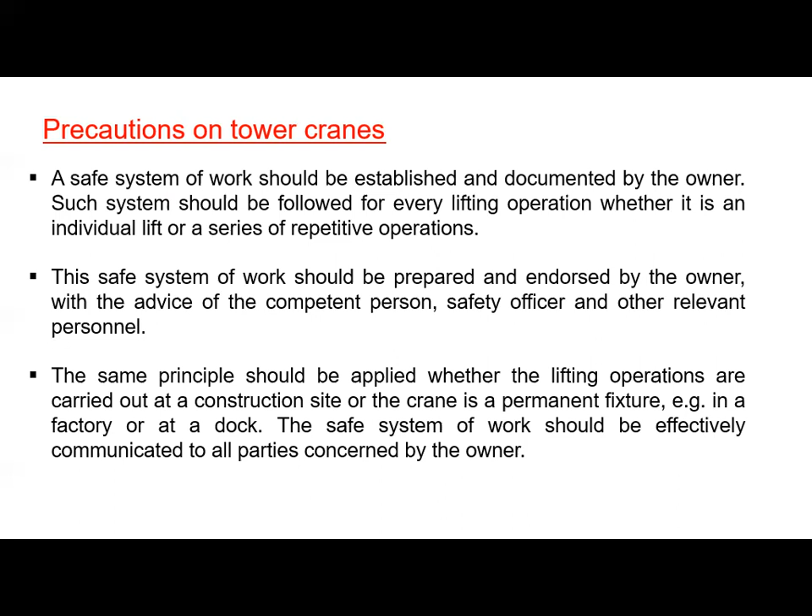Then there are certain temporary installations or structures also involved in construction sites. These structures are infinitely variable in design, type, size, and materials. Different materials are used for making these structures, like wood, metal or glass fiber, etc. So there are simple to very complex structures.

They may be assembled and configured with pre-engineered components such as scaffolding, trusses, platforms, etc., or any combination thereof. They may or may not have a roof, wall elements, or bleacher seating. So there is a variety of different temporary installations and structures.

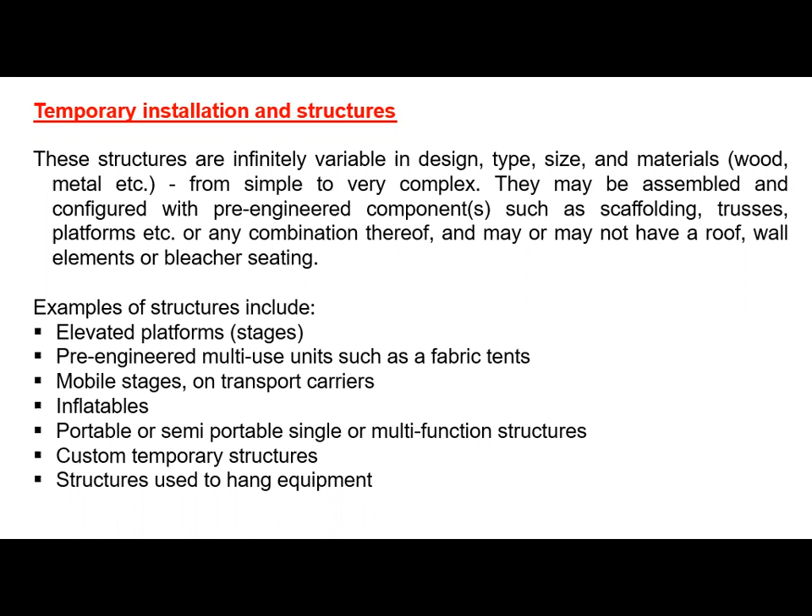Generally, the structures include elevated platforms, pre-engineered multi-use units such as fabric tents, mobile stages on transport carriers, inflatables, portable or semi-portable single or multifunctional structures, custom temporary structures, and structures used to hang equipment.

These structures are used to facilitate the construction of buildings, bridges, tunnels, and other above and below ground facilities by providing access, support, and protection for the facilities under construction, as well as assuring the safety of the workers. So depending on the conditions, we have to utilize these temporary installations and structures.

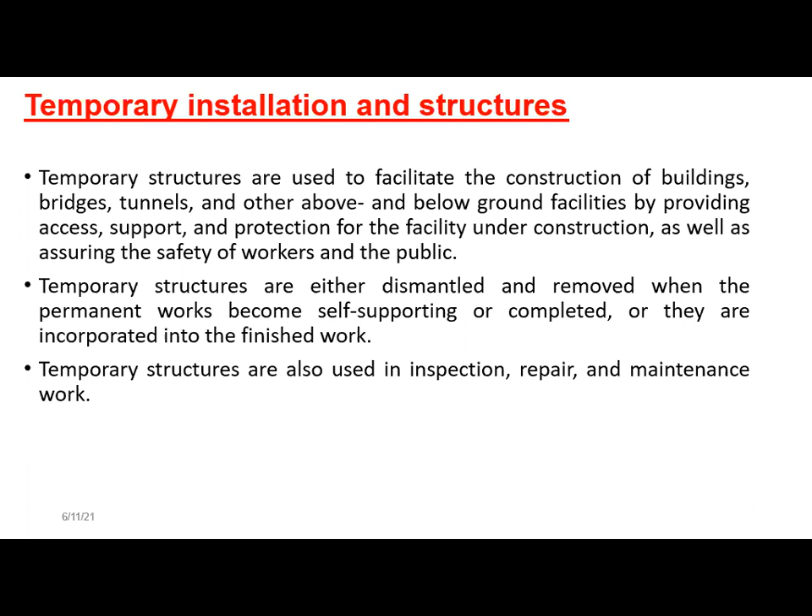These structures are either dismantled and removed when the permanent work becomes self-supporting or completed, or they are incorporated into the finished work. They are also used in inspection, repair, and maintenance work. So there is a variety of applications and uses of these temporary installations and structures. These are some examples of temporary structures for permanent structures, so we have to take care of these temporary structures also.

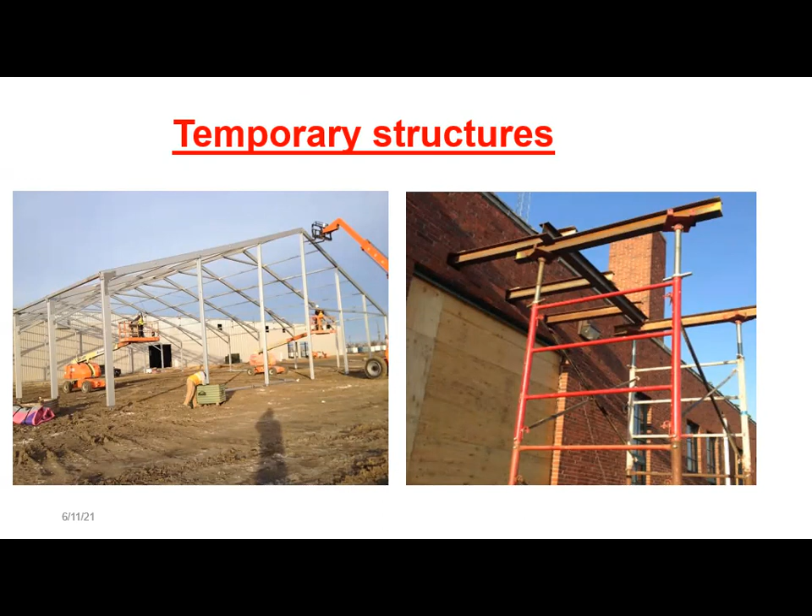There is a variety of temporary structures like cofferdams, earth retaining structures, tunneling supports, underpinning, diaphragm or slurry walls, roadway decking, construction ramps, runways and platforms, scaffolding, shoring, falsework, concrete formwork, bracing and guying, sidewalk bridges, and other site protection structures.

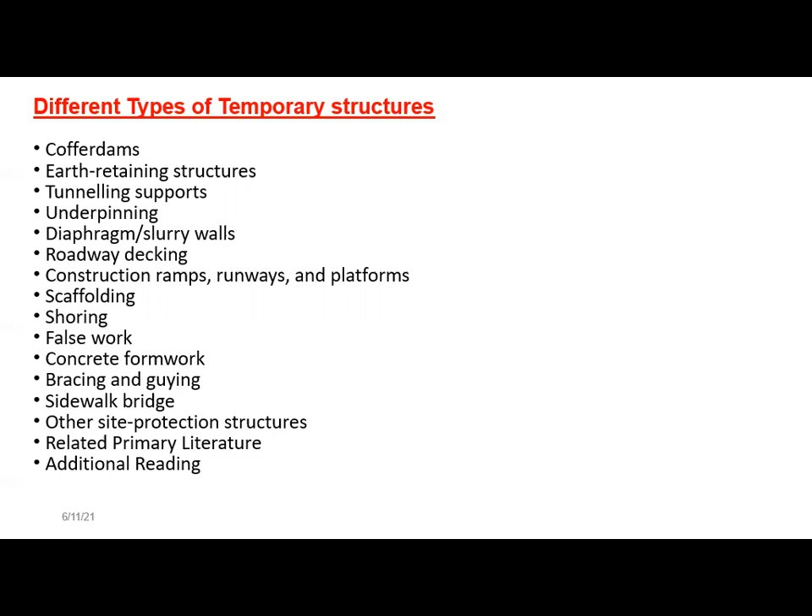Related primary literature and additional readings can be utilized by the students so that they can get ideas on the different temporary structures and their precautionary measures. So this is all about the safety precautionary measures and different concepts related to construction work, especially working at height. Thank you.